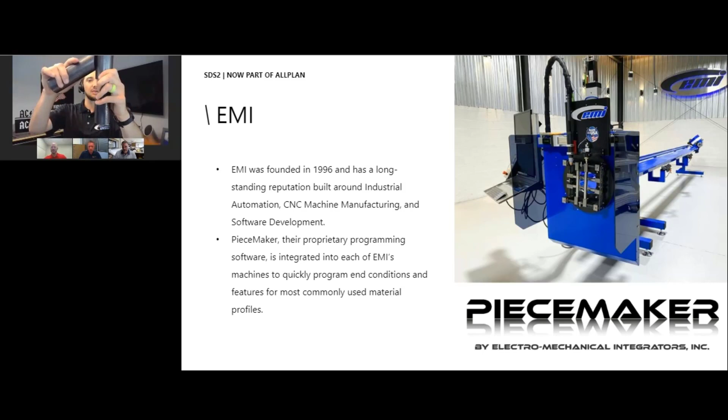The last thing is new in development, but it's something we'll brag about here. We call it super joint. Instead of coping to the outside of the material, we cut a notch on the inside that allows your mid rails to slide right up inside of it like that. Again, it gives you a nice place to lay your bead of weld, not as much grinding. On top of that, you've got perfectly open galvanized joints, so you're not having to pop in weep holes and fill them. It's all internally vented.

Then there's the precision. There's not much point in making a CNC machine if it's not going to be precise. You want to be able to tell the machine what you need and get it right then and there. Industry margins in the fabrication world are pretty tight, so a couple nickels and dimes can mean the difference between a major profit or a major loss. We want you guys to not have to worry about how many times we're going to have to remake these parts.

We just want you to be able to move on from them. So we use a closed loop servo motor system that's been proven with tests on a CMM machine to have your positional range from plus or minus a 16th and your feature tolerance from plus or minus a 32nd. So again, you're going from measuring with that tape, marking it with the crayon, cutting it with the torch, to being within fractions of a millimeter when you fit stuff up.

Lastly, we've got ease of use. I get the benefit of being the EMI employee that gets to go out and see a lot of these machines in use in the field. I want to brag a little bit about the fact that within the first hour of training, this is what we usually cut. The machine's sitting on your floor for an hour, and you've already spit out the first flat handrail from it. Within the next hour, you'll end up getting yourself a sloped handrail. And by the time your guys finish cutting or eating lunch, we're cutting production parts. They're going to the weld benches to get fit up, and everybody's happy.

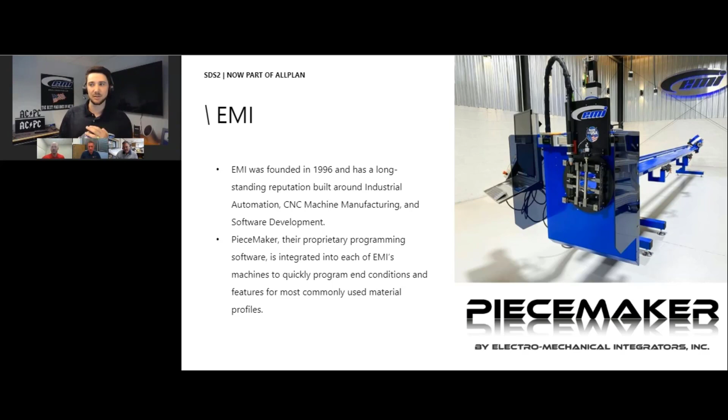Next, there was a local artist named Zach Oxman - you can look him up on Instagram. He made a pavilion for a customer down in Charlotte, North Carolina. It's like a canopy thing that's shaped like a lotus flower. You can imagine artist, lotus flower, not typically looking to make things easy for fabricators to put together. So he reached out to us over at EMI and said, hey, I've got some really weird end geometry on these parts. I heard you guys are great at cutting up pipe. Can you help me out here? So we cut about 60 braces for that project that he was able to put all together. Again, if you can dream it, we can make it work.

We're doing stuff for propulsion launch pads in the aerospace industry. One of our customers is one of the premier East Coast drag racer chassis builders. So it's not just steel in the fabrication industry that we deal with - we kind of can open up to anything.

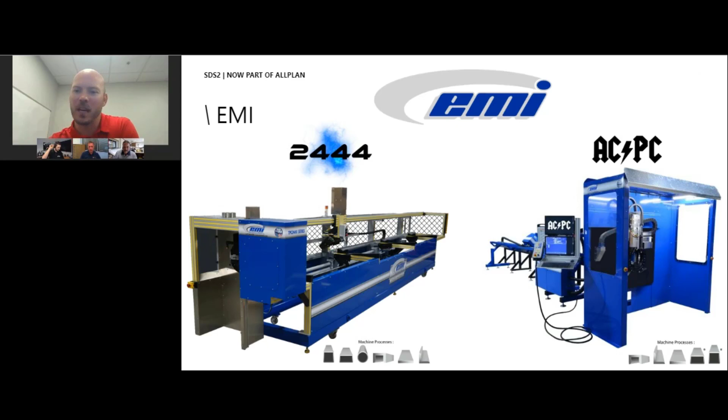Sure. So Brion Hardin Construction started in 1995, specializing in industrial construction, ASME code vessel fabrication, process piping, and then in time we've gotten into structural steel fabrication and erection.

We've got crane rentals, and then we also do machinery rigging and installs. So we see a good mix of requirements from the fabrication side in the shop to support multiple facets of the company. We may be making shim packs and pipe flanges to get them onto a job site to support an install or even a demo or a modification at a refinery, while we're running structural fabrication in the shop for a new core facility or a new commercial building here in town. So we've got a pretty good mix of requirements.

One of the things we tried to do was bring in some sort of system to tie all this together. We did a lot of research and time, and ultimately we chose to go with STRUMIS.

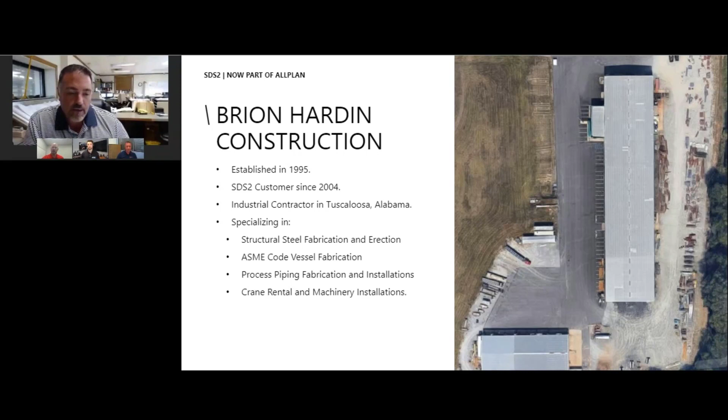Jumping to the next slide to give you a little idea of the shop: we've got laser process in-house, plate drilling and cutting in-house, standard oxy-fuel, burn table, angle line, drill line. One of the components we were missing was the ability to efficiently produce handrail.

We had come through the shop over time and integrated STRUMIS in multiple phases. We started with just standard production control—actually, I take that back. We started with inventory control because inventory was something easy to put into the system. From there, we went to light purchasing and material receiving, heat number tracking, and then we worked our way into production control.

We set some very simple status stop points for production control—saw cut, fit, weld—and over time we added additional checkpoints to the system. One of the beauties of STRUMIS is we can tailor those checkpoints to the individual project, and set the same status points within SDS2, so that when we get to them, we get that communication between the two software packages.

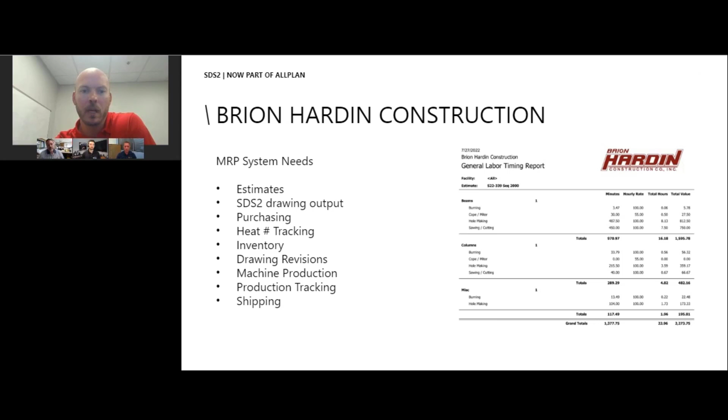Is this report then straight from STRUMIS, just an out-of-the-box report for you? Yeah, this is a project that we did about 6 weeks ago. It's in 727 there. So this material here actually went out to Houston, Texas, for a customer of ours that had asked us to step in and help them produce the material.

So we took it, ran it through the system, got a quick time, to see if we could stop our commercial production work that we were doing, slide in this project for a customer. So we gather these man hours based on what it tells us it's going to take to go through the machines. In order to run something through, we've got to stop one to produce for another customer.

So we use that as one of the tools and features within STRUMIS, and it also has the ability to show us the backlog that we have assigned to the machines. So we can look at that and see where production control is as far as going through those machines.

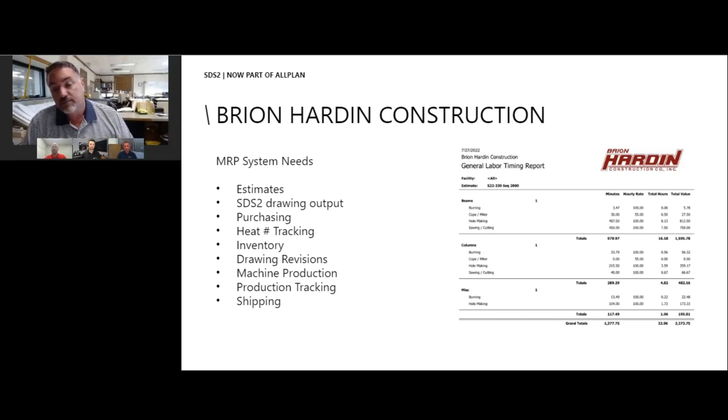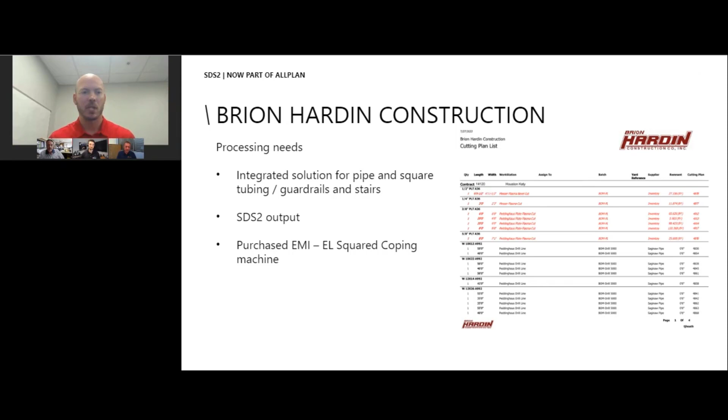Very good, very good. Now we're on to a little bit of the processing needs here with what led you to implement the EMI machine, correct? Yeah, so on this slide here.

What we do is we create a cutting plan list, shows the shop based on the cut plans that are produced, which machine they're going to be processed on. So in this, these components here are actually structural, but we assign the cut list to a machine. And we do the same thing when we use the EMI EL squared coper for both round material, square material, and angle shaped material, as we figured out how to run angle, odd leg size angle on the machine.

In addition to that, what we have found is that on our angle line, we can't produce long slots. We've run into a condition where we need 1 7/8 inch slots. Can't punch that because that's larger than the punch body. But we can put it into the EMI and burn that slot in there, treat it as such under a cut condition.

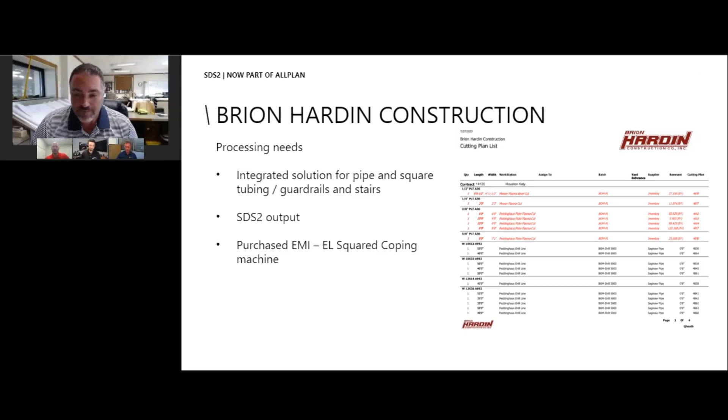Aaron's helped us out numerous times on the phone where I've called him and said, I got a problem, and he's like, here, let's tweak a setting and get you squared away. So we've been able to step outside the box for some of the shapes that we've had to cut for different projects over time with the EMI. Good job, Aaron, way to go with that support there. Yeah, that's what we're here for.

What's next? The next slide here looks like we got some barcoding, a lot going on here. Tell us a little bit about this and the implementation then. All right, so like I said, we put STRUMIS into project control back in 2019, and we started with active inventory and heat numbers that we could gather.

Data logging with that. So up in the top right-hand corner, you see a screenshot of a material traceability report where we've purchased new material or it's come out of inventory and been used for a project, so we can trace it back to its origin as far as when we brought it into our system. There's a copy of a cut list up there in the top left-hand corner, I think that was for the drill line.

Basically showing what size material is coming in, that material length, and then what parts are allocated to be produced from that.

From there, once those parts are cut, you see 3 examples of a tag, and one is the yard ID 478. That's just an inventory control tag.

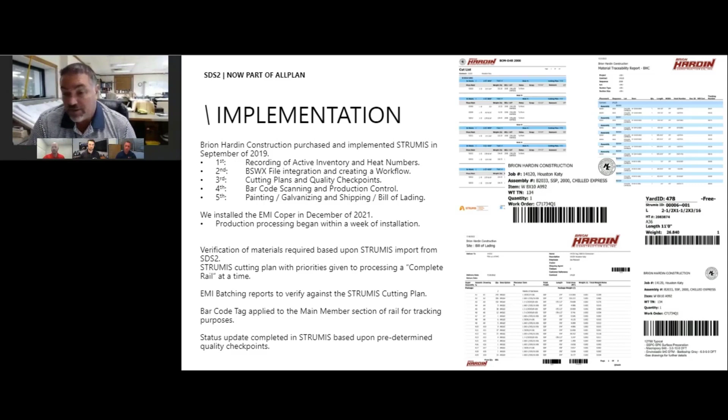One of the big advantages for us is the built-in barcoding. We're not relying on a third-party system, not having to translate, load, or output information to it and then bring it back in and verify that it's being read correctly. It's not intertwined with another project because it's got a similar part number. With this, we've not had any issue. We just use some simple tablets and run the mobility app, and we've had excellent luck with it since we put it in.

Very good. So a couple things I'll point out here. You did mention the barcoding - that's built into STRUMIS, so no additional third parties needed. I'll also point out, in order for that to work, I know a lot of fabricators are still stuck on the old KISS files, transferring information from SDS2 to STRUMIS. Barcoding isn't possible with KISS files - there's just not enough information and unique identifying numbers for the different parts and materials within that file for the barcoding to track everything properly.

So you do need to use the BSWX file format that SDS2 outputs. In order to do that, we have a plug-in on our SDS2 toolbox from our website that will produce the file necessary for that. So just a couple things to point out there on that front.

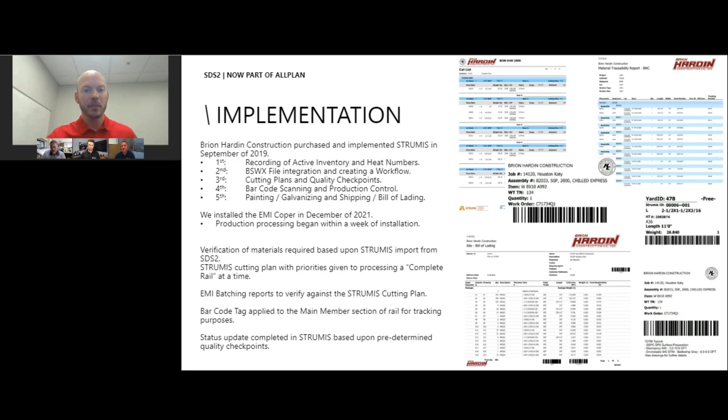And then I think we've got this model here, and we'll see this model here within SDS2 in a bit, but a couple screenshots. This is also that we kind of saw in one of those screenshots of your shop here earlier.

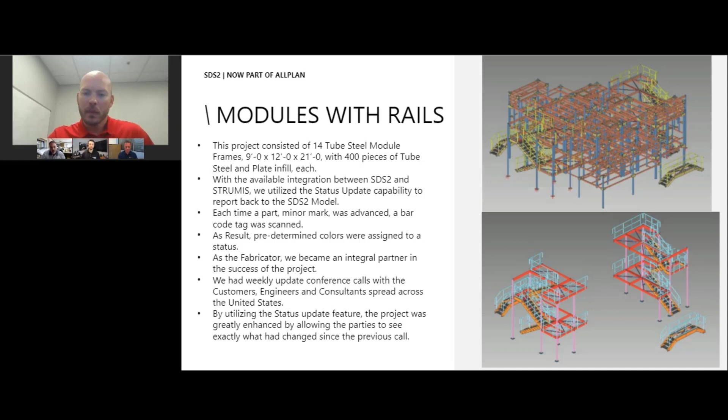But I believe this is the first project where you had everything integrated and brought together. So on this project, we worked very closely with STRUMIS and SDS2 to integrate the live tracking through the BSWX model, along with barcode tracking of everything as far as all the components produced.

It wasn't your standard structural project, and we didn't want to have engraved piece marks on all the submaterial, because each of the 14 modules has close to 400 pieces of infill inside them once you have the tube steel frame. So we went back and worked with SDS2 to get the tracking feature down to submaterial level in addition to main member level.

So we did a little bit of collaboration with Brandon in your office, David, to get that put together. Chris and his team were great, our outside detailer support was great, and our IT group got us all integrated as one so that we could use these color-coded status updates.

As the material was received, that lot was placed into STRUMIS so we knew it was in, and we had the heat numbers. We went into production, and every time we saw-cut a part, we put a 1x4 tag on it—a simple tag with material length, part number, and barcode. Those are low-tack tags.

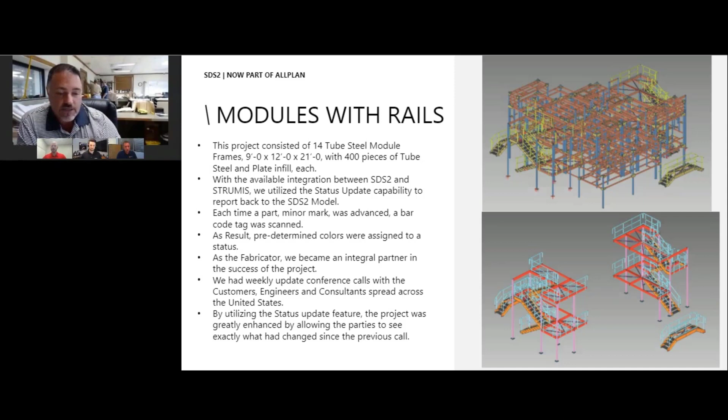If you jump to the next slide, you'll see the modules. It gives you an idea of what's going on when they all stack together. You see some of that tracking down there across the bottom, and the little white tags on the piece of tube steel and piece of plate. The frame itself is a seismic rated frame, so all those parts had to be just right to meet the seismic criteria. Then we have the process support material that was the infill.

Very complex—we worked on the drawings for 1.5 years before we ever purchased material. It got to where our 3D model basically became the check of the design team's model.

It started off in Autodesk Inventor, went to SolidWorks, we got it into SDS2 and fixed it, converted it back out, and they'd run it against their SolidWorks model to figure out where we had made corrections to get all the geometry right.

So it was a big plus for us, because then we already knew when we go to production we can track these parts. If they have a change, a modification, or a clarification comes through, we know exactly where it's at and what we need to do—stop it and either work around the issue or work with it. So it was a big, big plus for us that everything was integrated.

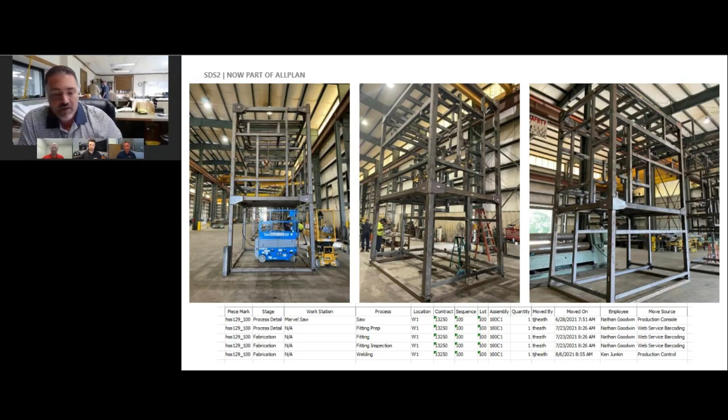So on the next slide, up there where it says rail processing, I went back and grabbed all the timesheets and put this together. There's 438 pieces of pipe material. You see the saw cuts and how many miters, copes, miter to the left end, right end, the cope on each end, and how many were reworked, because there was a lot of missed copes due to timing on the ends of the parts.

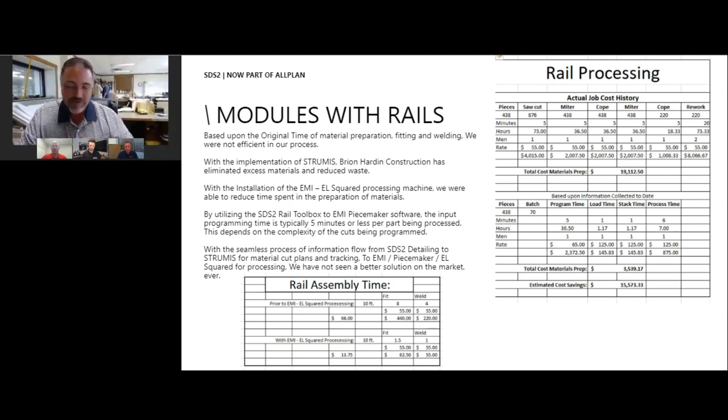One of the big pluses of EMI is you have a button in there that lets you control what that offset is, whether it's 0 or 180, based on your rail geometry.

So we went through and here's the actual cost of what it cost us to do it. Then we also ran the same number of the same original rails through the piecemaker—it said, hey, you need 70 sticks of pipe, and we went through using some current time we've seen material run through the machine to get some parts. We're not pushing the machine quite as hard as what Aaron had spoken about earlier, but we're getting good quality parts off of it for us.

I've done some cost analysis in there. Whereas originally in material prep it was somewhere around $19,000, had we run it through the EMI machine, we would have been somewhere about $3,500, plus or minus a little bit.

To produce a 10-foot section of rail manually was about $66 a foot in labor, compared to coming off the EMI machine, down to around $14.

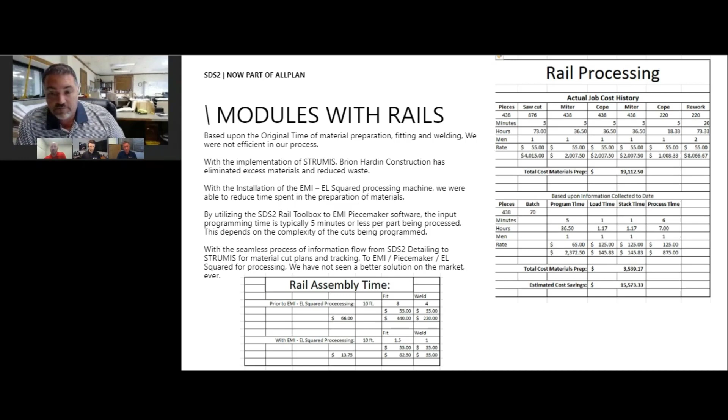Awesome. Let me switch over here and share my screen, so we'll give you a bit of a rundown on what this all kind of looks like within SDS2.

So let me just share my screen here. Hopefully you guys see my SDS2 model up here. Looks like that model that Joe shared some screenshots of a little bit earlier, so he shared that with me just to give you a little bit of an idea here.

So I mentioned the STRUMIS and the BSWX. Chris did inform me here on the back channel that I spoke incorrectly earlier. BSWX is not required for the barcoding, that is still possible doing the KISS files. It is required, however, for getting the status updates back into SDS2. So a little clarification there.

So here's our model, here's my STRUMIS export. Like I mentioned, I've modified under the Import-Export tab to go ahead and just group those together here. So when I run that, as I was saying, we've got our output path, file name. I could just check that on and say give me all the data, or I can pick and choose whether I want specific members, select by the details sheet, throw in my CNC info, attach my drawings, all that done through here. So pretty simple.

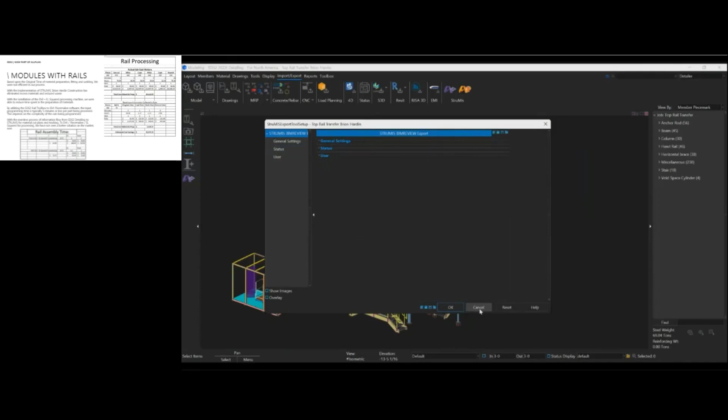It's going to create a BSWX file. It's going to have all the drawings exported at the same time, all the CNC exported at the same time for you. And then when we want to get to those status updates that Joe was discussing, we do have the production status set here now. In order for this to work, it pulls the information directly from the STRUMIS database, so you do have to set that up to connect to the STRUMIS database. I don't have that ability.

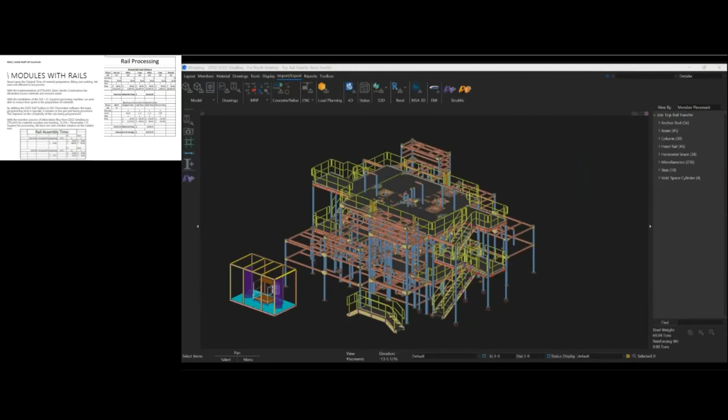What I will do here is pull up a couple of screenshots. So can you see my screenshots here, Chris, or am I still on the model here? You're still on the model. Still on the model, let me see if I can adjust that here and get my screenshots up then. So let's go here.

I can go ahead and show you some of the status updates here then. Joe, can you give us any idea what some of the status updates are on what I have shown here in this screenshot?

On this one here, David, anything shown in red was in the fitting process - the material was saw cut and at the fit stations. Anything shown in pink is fit complete, QC check has been done, and it's in the welding staging area. Anything shown in orange, which would be the stair stringers, means welding complete.

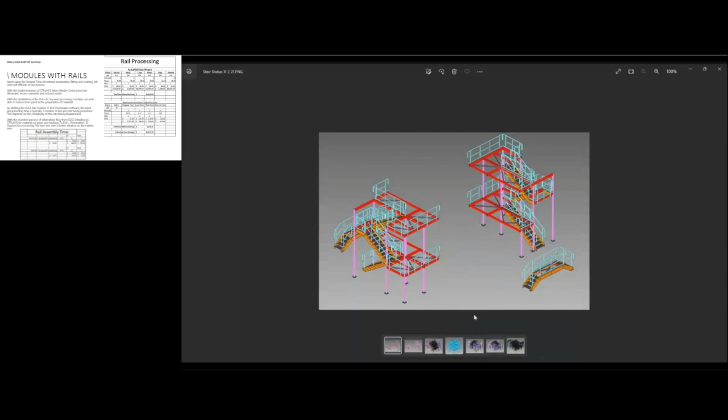The cyan was fit complete, and those rails were welded to the matching connection components for the bolt-on or weld-on feet or shoes to go onto the material. And then ultimately, the diagonal bracing, which would have been purple, means completed parts ready for shipment.

Okay, hopefully you see the new screenshot here. We've got another screenshot with a lot of magenta, and we throw some black in there now. Yeah, so the black was delivered to site - that's delivered to our customers at that point.

Yeah, so you must barcode even at site, like when it's unloaded then as well? You scan that barcode to get the update back on that, or? We use the barcode feature that's on the bill of lading. So when we've loaded the truck, either one component to a truck that has the main member barcode, or we've put 150 beams on a truck, it builds that barcode or bill of lading out for us.

We get a barcode generated in the top right-hand corner, so we can scan that barcode and say trailer number 5 is ready. Then when it leaves, we can scan the barcode again and get a time date stamp of when it left our facility. Depending on how it's set up to receive the material, we can actually barcode it when it's offloaded at the customer site.

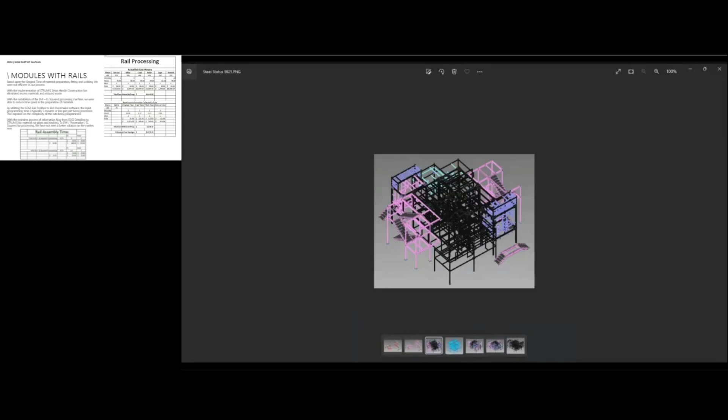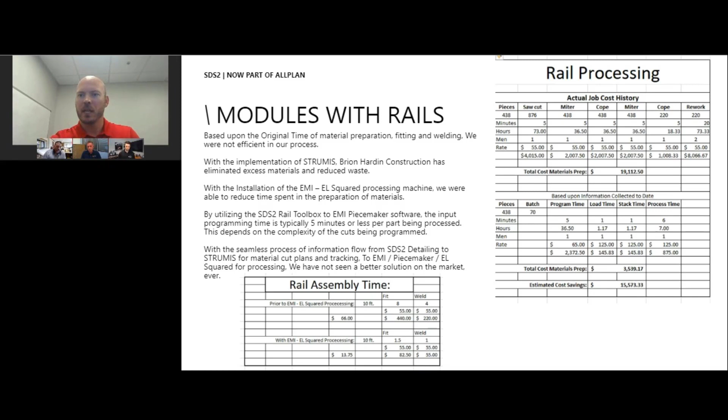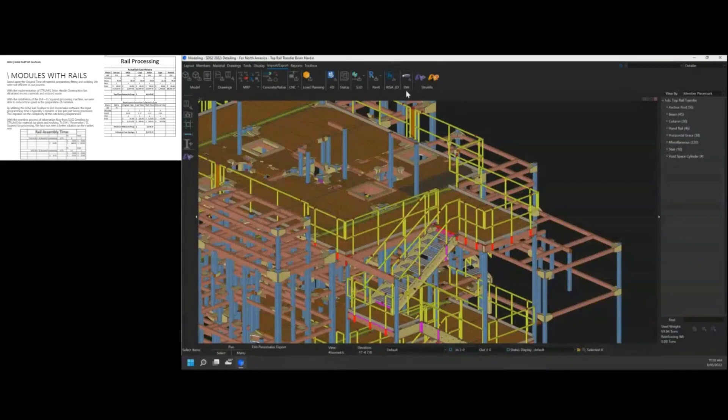Just to give you an idea, the EMI export that we've developed is a toolbox item - you can get that from our website on the SDS2 toolbox. I've modified my import-export tab through a section here for the EMI, so it's standing there on its own. Now, I'll point out, a lot of companies, a lot of fabricators are looking at the EMI machines specifically for their handrails. That's great.

It doesn't necessarily have to be for handrail. This is going to work for other materials - that's tube, pipe. Right now the export from SDS2 is working with both tube and pipe. So it can be a beam, it can be a column. It's more limited at this point to the machine limitations - what size of material can be run through that machine.

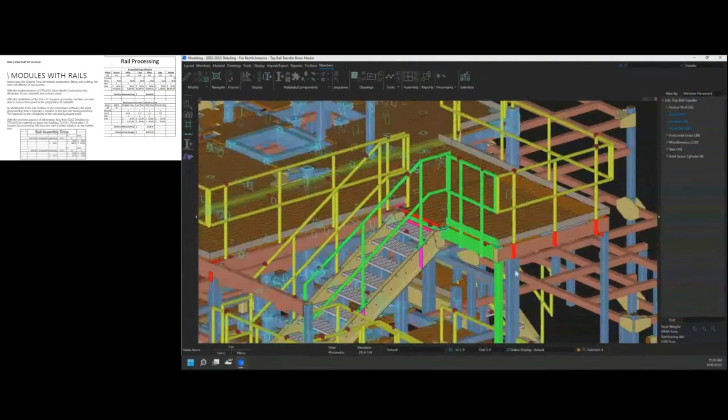So just kind of the way this works, I'm going to select a few items here in the model. I've got a couple beams, a column, some handrail in there. And when I hit the EMI export, this is actually going to give me a screen, and it kind of previews or shows me the output that I'm going to get within this screen.

If there are certain things about this that I want to modify even before it gets exported, I have the ability to come in here and lock that variable, make an adjustment here so that it then gets output with the values that I input. Generally speaking, I hope we get that right, and you aren't going to have to be doing that a bunch, but we do have the ability to get that done.

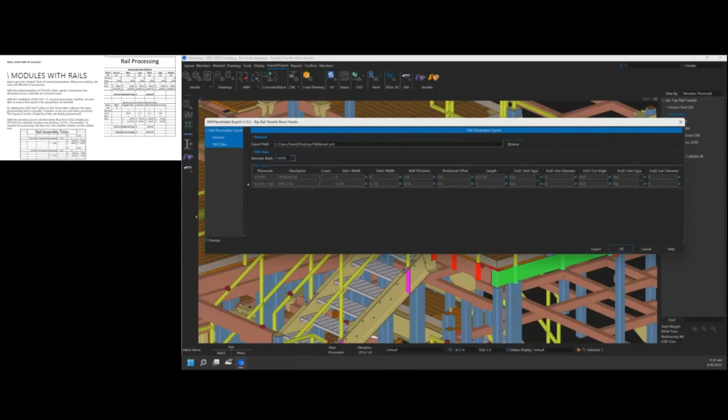And then you can see here with the member mark, so that's just for the one column. And then I can flip that over to my beam - you'll actually notice that it highlights the appropriate member in the model as I flip through that. We're getting that, and then the screen repopulates with the information for that particular member that I have selected.

And you're going to notice, it goes through, it reads, detects every pipe, every HSS on that member, and that's the information we're going to see populated within here. When I do the export, it sends it out to the path that I have set here.

It produces an XML file, and that goes into the Pacemaker software, then that runs the EMI machines. So fairly basic there, pretty straightforward.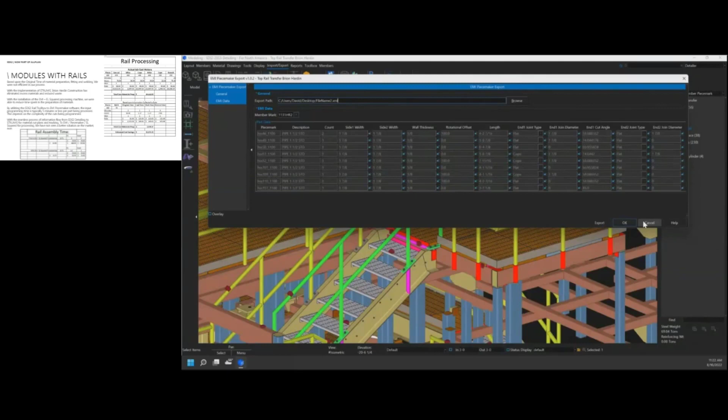A couple things I'll point out. With galvanizing, your vent holes, your drain holes, all that good stuff can be pretty cumbersome a lot of times. So EMI and their Peacemaker software do have a rules-based setup you can configure to tell it how to create the vent holes.

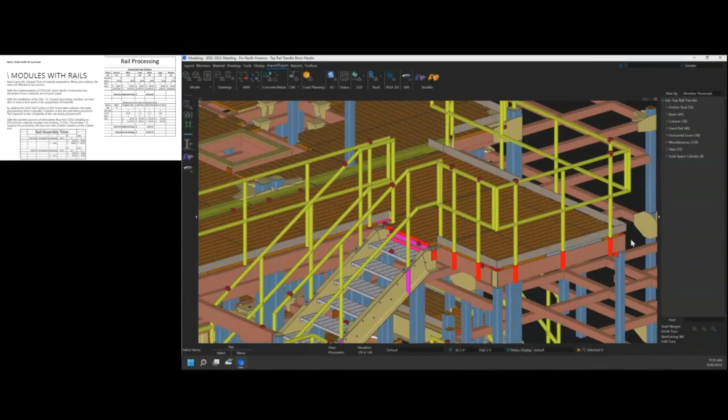So we've thought about that as well and how to get that from SDS2 to EMI. What we've done is use a custom property. If I grab one of my materials and look at the material properties, you'll see an internal venting strategy here. This particular project, Brion Hardin's, is using some older custom properties, so the screen might look a little different than what you're typically used to. But this internal venting strategy, if set up and applied to this material, matches that internal venting strategy in the Peacemaker software, and it will go ahead and get those vents applied as set up in the Peacemaker software. So that's kind of nice there.

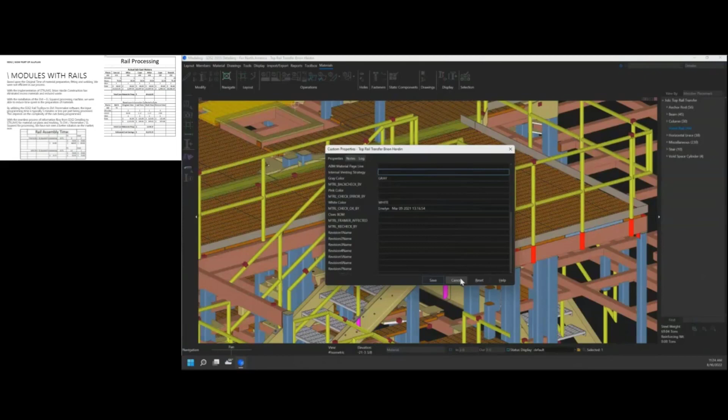In order to make this easy to apply, here's a little tip with the handrail members. Generally every material on those handrail members gets a usage description applied to it based on what it is, whether it's a mid-rail, a post, or a P-end. They have these usage descriptions automatically applied to them.

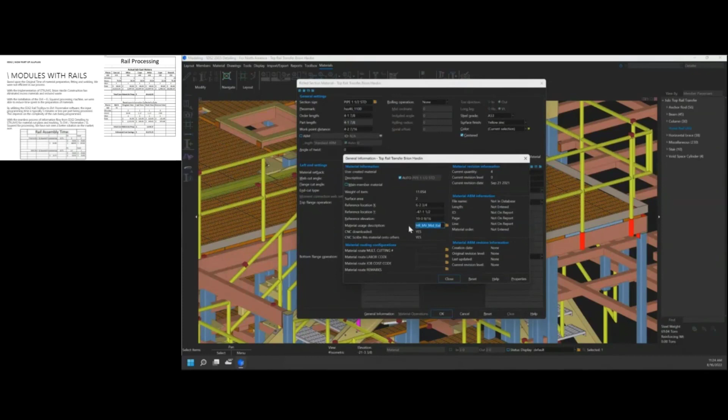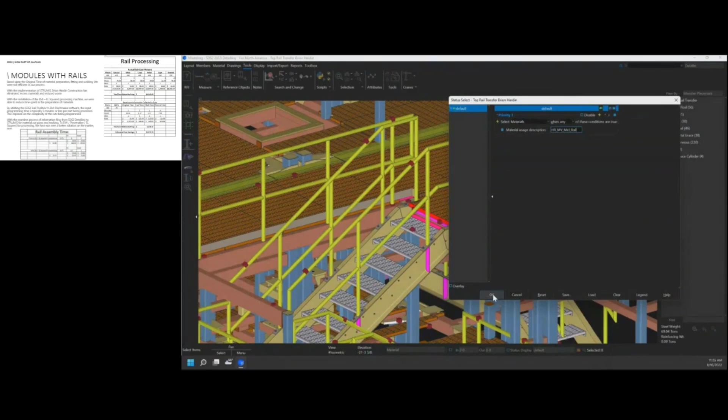I could take that and use my status display, or use the status select tool. This is a very similar interface to the status display, but I can use it for selection, so I can select materials when the material usage description matches that usage description for handrails. Notice it goes through the entire model and grabs every mid-rail. So if I wanted to apply that venting strategy to all the ones I had selected, I can hit material properties and put that in there—or maybe the venting strategy is just called mid-rail in Peacemaker, whatever it is. We just need to coordinate so those match and transfer over.

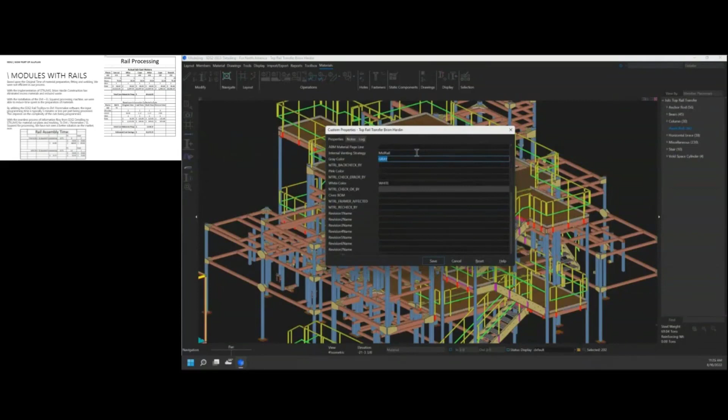Nice little tool there, a couple things to note. I have another model here that I'll pull up, just to show you how to actually get that internal venting strategy custom property in there if you're not seeing it. I'm having to coordinate and manage multiple screens here.

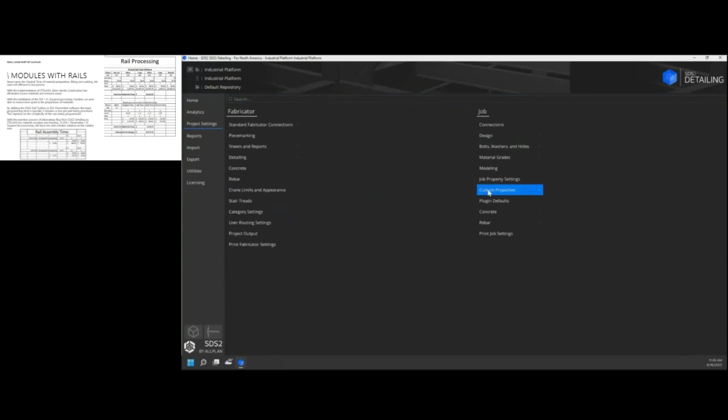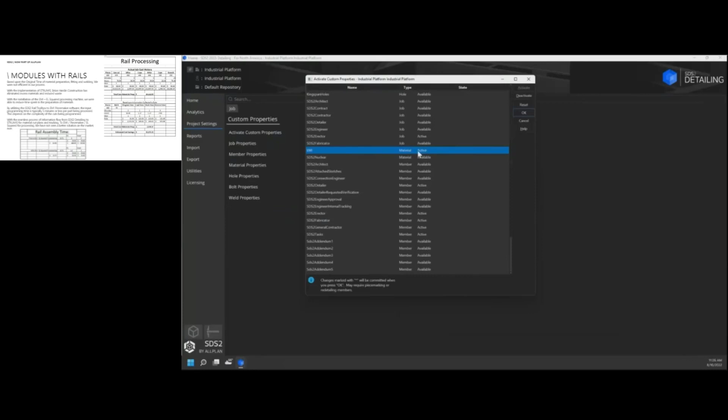So on my project settings—I go out to my home screen—in my project settings I can go to custom properties and activate custom properties. We provide this out of the box, so we have this EMI custom property. I just have to make sure I come in here, and if this says available, I pick that and hit activate. This will turn to say active, so now I know it's active on this particular project.

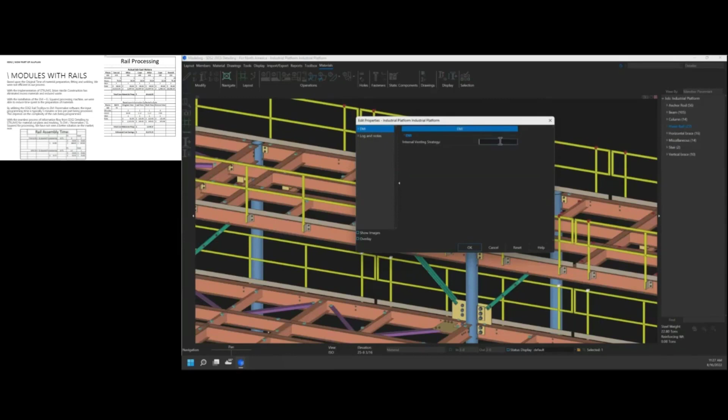And then when I'm in the model, when I grab the material again and look at the custom properties, this is what a lot of you might be seeing if you're using more out-of-the-box custom properties, where we have the tree on the left separated into different sections. So you'll see a specific EMI leaf here on the left with that internal venting strategy that we can use.

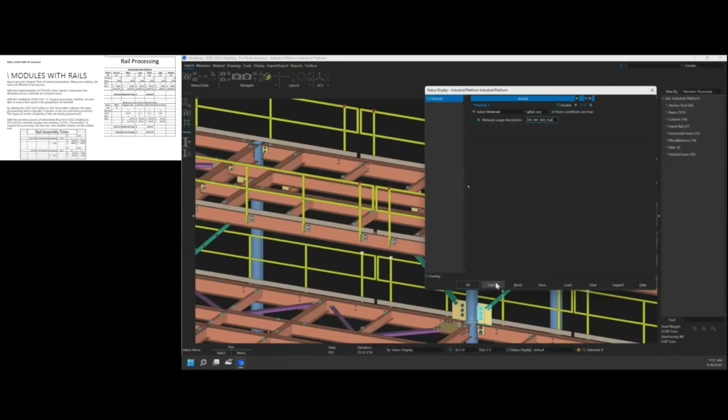I could also run my status display—I have a selection filter that uses status display. I could do the same thing I did previously with the status select, but this lets me be a little more precise. I put my material usage description in there, and now when I draw my selection box, it filters and grabs only those materials within that box that have that specific usage description, so I can apply properties or do whatever I need at that point.

So that's kind of the SDS2 side of things a little bit—a couple tips there.